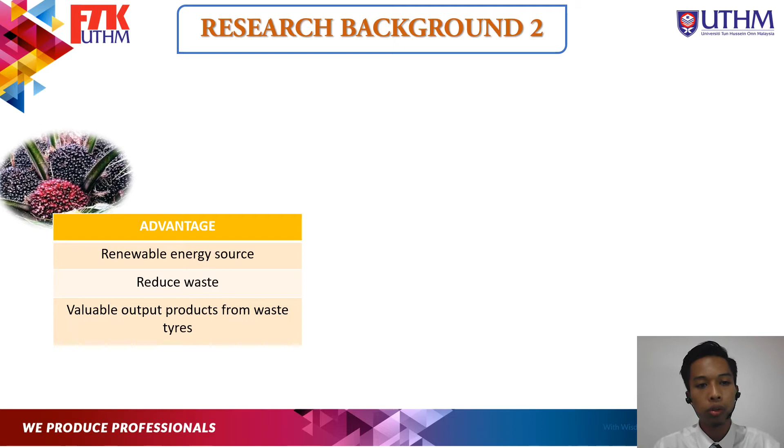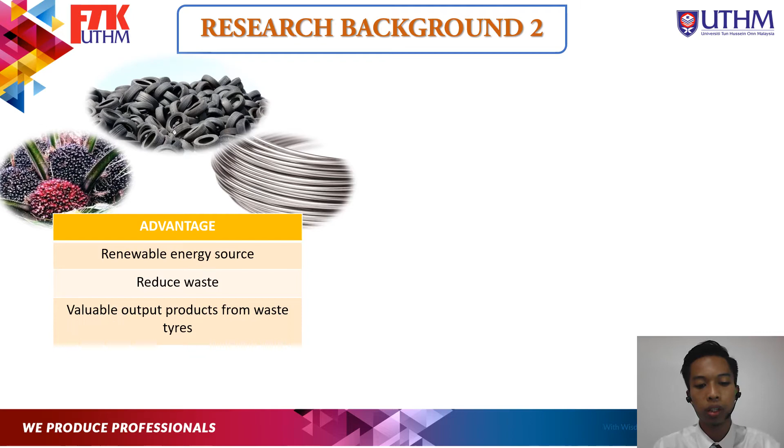So tire pyrolysis and crude palm oil can be used in diesel engines, but the properties of this fuel must be studied. So there are a few advantages and disadvantages of tire pyrolysis oil and crude palm oil. First advantage is it is a renewable energy source. As we know, palm is a renewable energy source. Then it can reduce waste. Waste tires can be reduced if they are recycled as a fuel. And next, a valuable output product. Waste tires can give other products such as steel wire and carbon black.

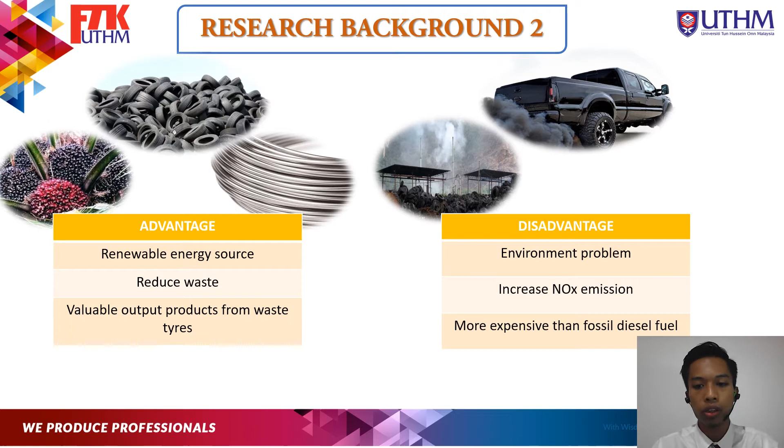So for the disadvantages of this alternative fuel, first is environmental problems. Illegal pyrolysis plants will lead to environmental pollution. And next, increased NOx emission. Biodiesel will increase NOx emission because it contains more oxygen. And lastly, it is more expensive than fossil diesel fuel.

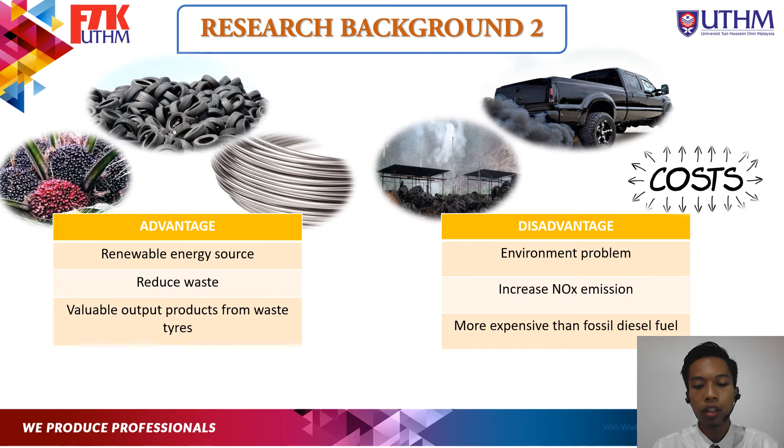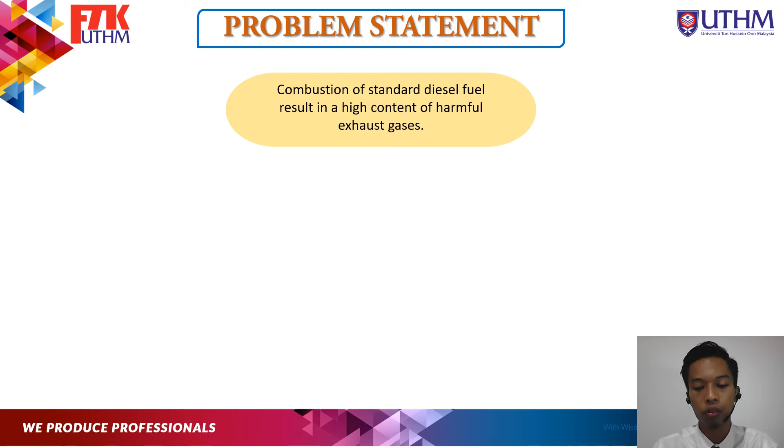So we move to the problem statement. Alternative fuel can be blended with diesel, but the percentage of this fuel mixed with diesel must be appropriate. So the problem comes when combustion of standard diesel fuel results in a high content of harmful exhaust gases. Then, diesel fossil fuel is non-renewable energy.

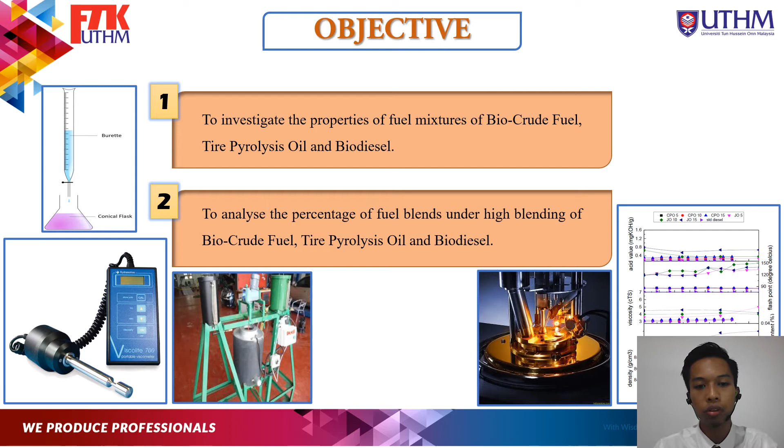So for the objectives of this study, the first is to investigate the properties of the fuel mixture of biocrude fuel, tire pyrolysis oil, and biodiesel, and then to analyze the percentage of fuel blends under high blending of biocrude fuel, tire pyrolysis oil, and biodiesel.

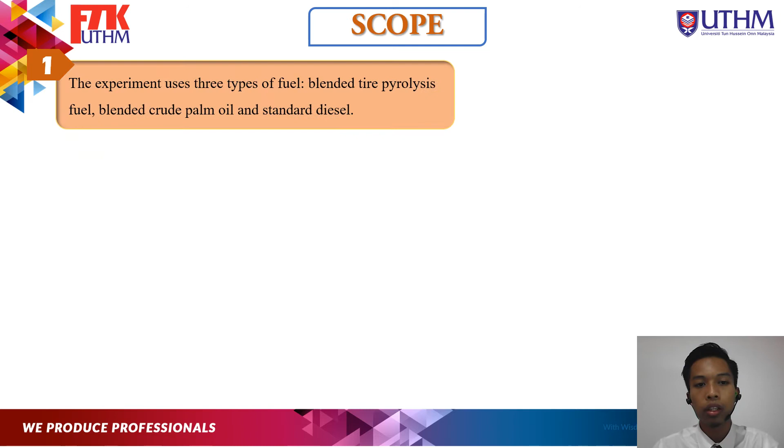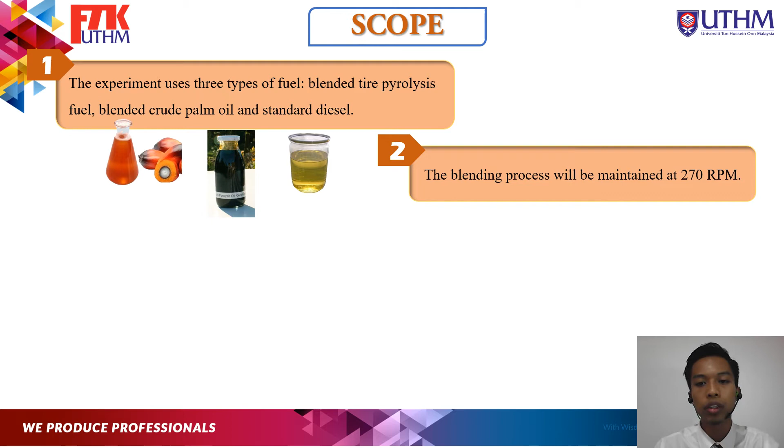So for the scope of this study, the first is the experiment used three types of fuel, which are blended tire pyrolysis, blended crude palm oil, and standard diesel. Next, the blending process will be maintained at 270 rpm. Number 3, different alternative fuels which are TPO5, TPO10, TPO15, CPO5, CPO10, CPO15, and standard diesel. And lastly, only 5 properties will be analyzed, which are density, viscosity, flash point, acid value, and water content.

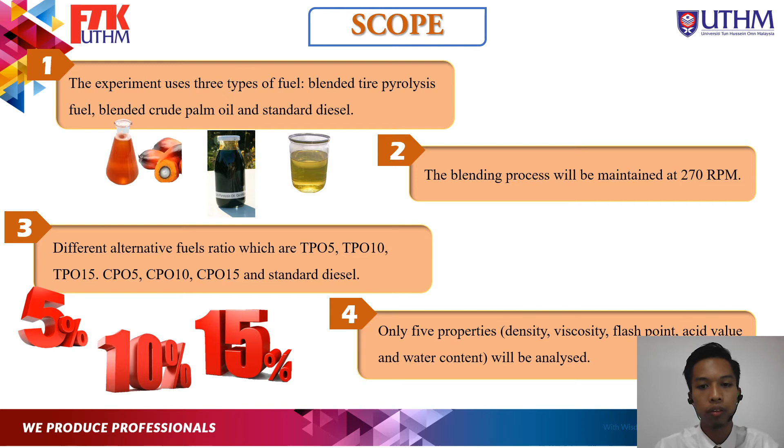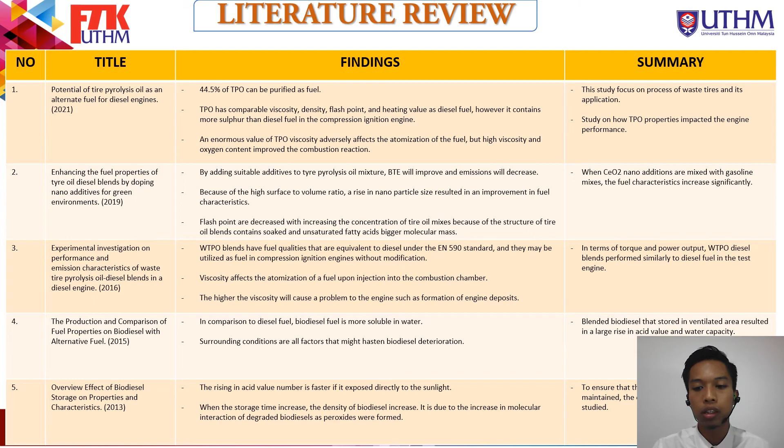And lastly, the overview effect of biodiesel storage on properties and characteristics. The finding is the rise in acid value number is faster if it is exposed directly to sunlight. So when the storage time increases, the density of biodiesel increases. It is due to increase in molecular interaction of degraded biodiesel as peroxides were formed. So for the summary, to ensure the quality of biodiesel can be properly maintained, the control substance must be carefully studied.

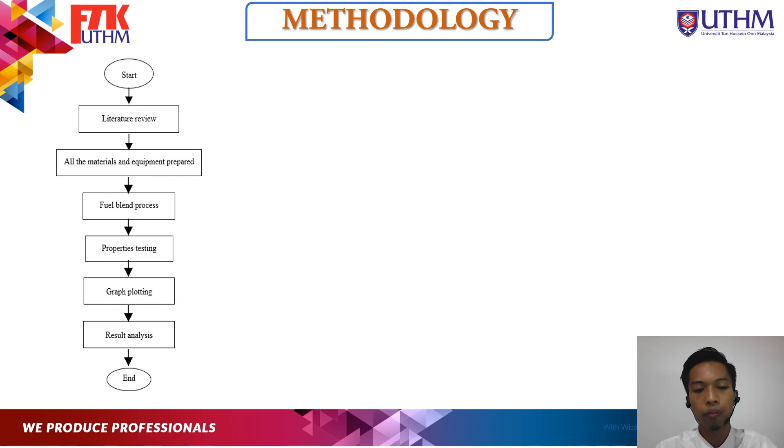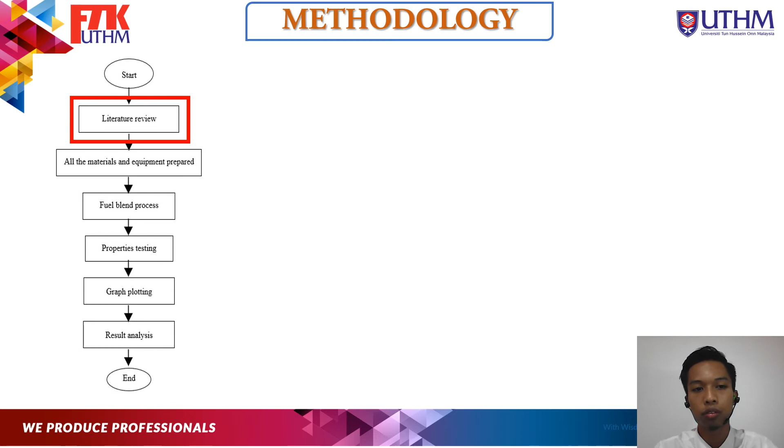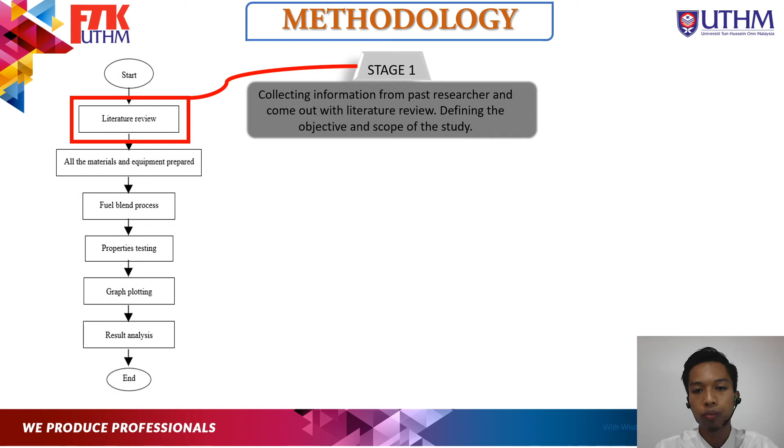Next, we move to the methodology. For this project, it has 3 stages involved. Stage 1 is literature review, which is for my final year project 1. It is done until the literature review. So for stage 1, I collect information from past researchers and come out with the literature review, and then I define the objective and scope of the study.

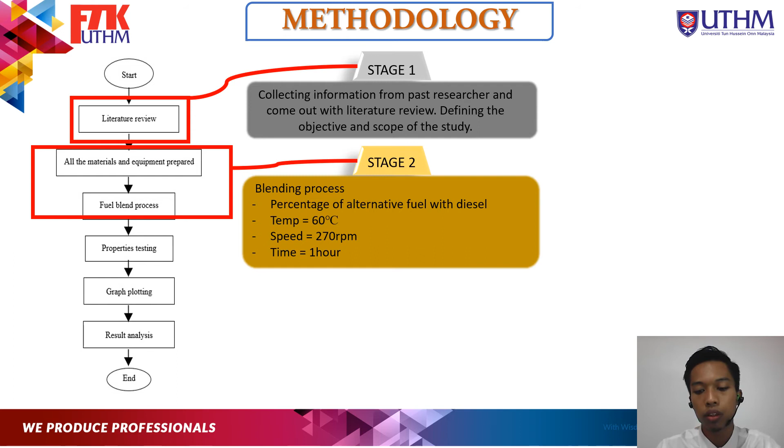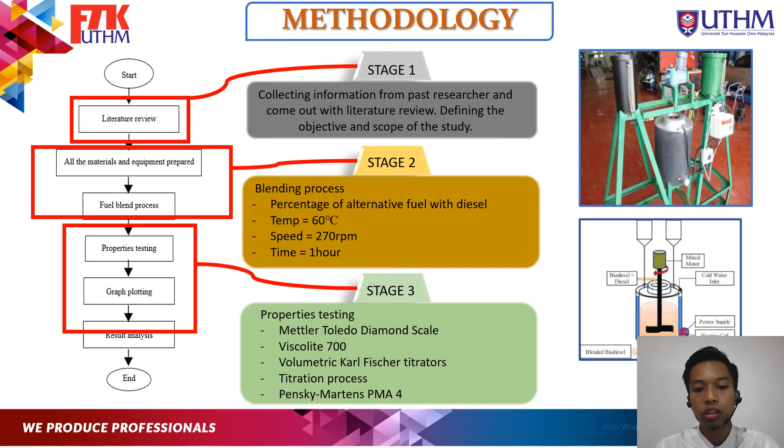And lastly, stage 3 is the properties testing. The equipment that I use to test the properties is the Mettler Toledo diamond scale, Viscolite 700, volumetric Karl Fischer titrator, titration process, and lastly Pensky-Martens PMA4. So this is the blending machine component.

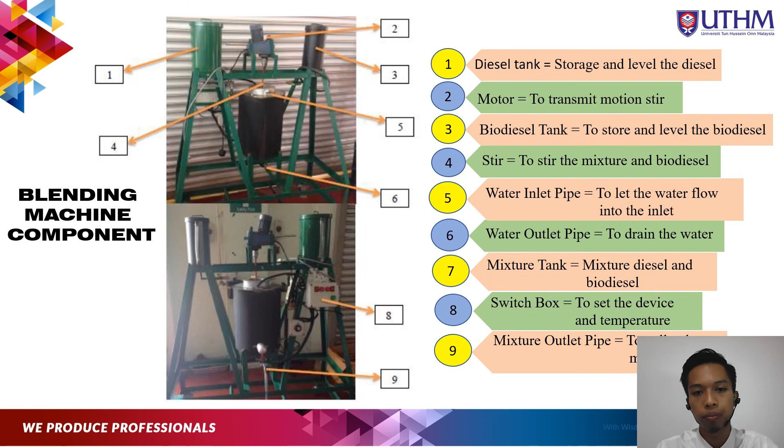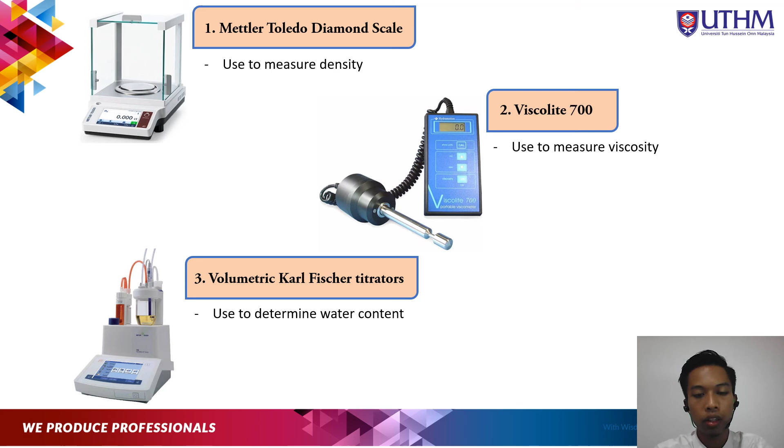Next, the equipment that I use for this properties testing. The first is the Mettler Toledo diamond scale. It is used to measure the density. The standard that I refer to is ASTM D1217. Next, the Viscolite 700, used to measure the viscosity of the fuel based on standard EN 3679. And the volumetric Karl Fischer titrator is used to determine the water content. The standard that I refer to is EN 12937.

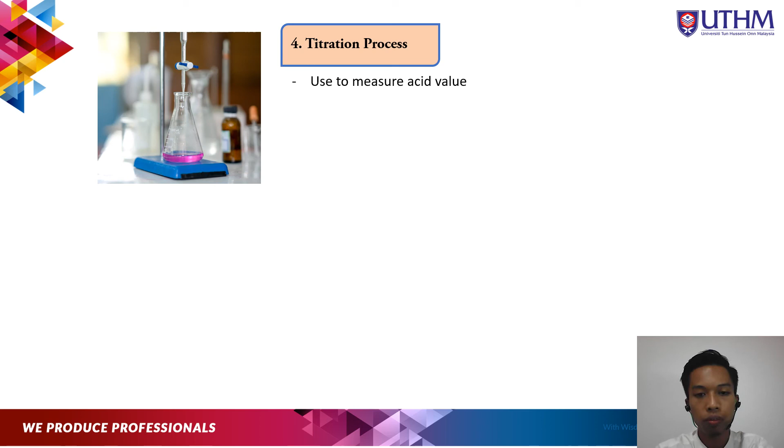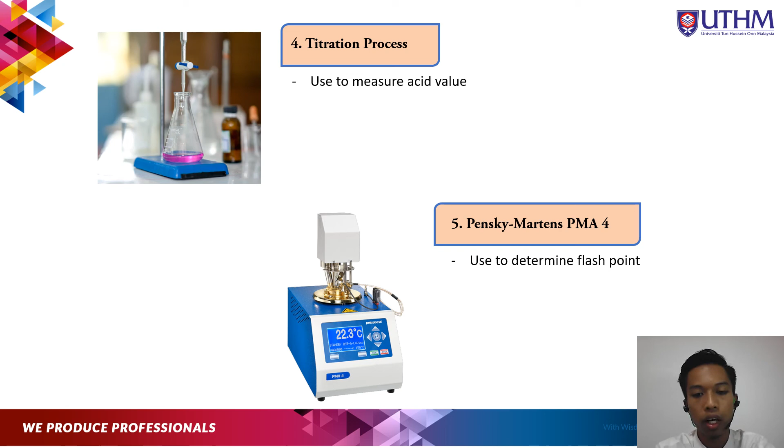And the titration process, used to measure the acid value. The standard that I refer to is EN 14104. And lastly, the Pensky-Martens PMA4. It is used to determine the flash point of the blended fuel based on standard EN ISO 2719.

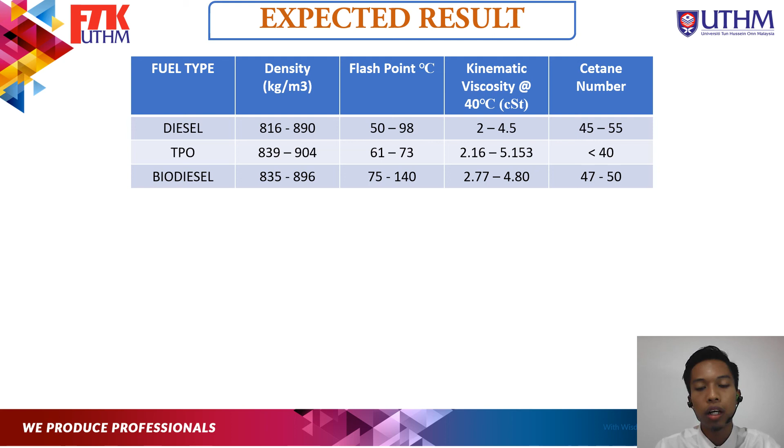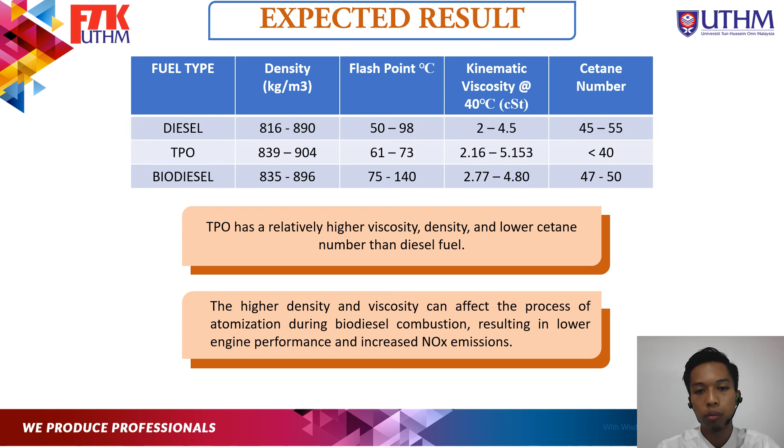So TPO has a relatively higher viscosity, density, and lower cetane number than diesel fuel. So the higher density and viscosity can affect the process of atomization during biodiesel combustion, resulting in lower engine performance and increased NOx emission. And lastly, for the conclusion, from previous studies, the different ratios of fuel mixture will give significant characteristics. So the properties of the fuel must be analyzed for better quality.